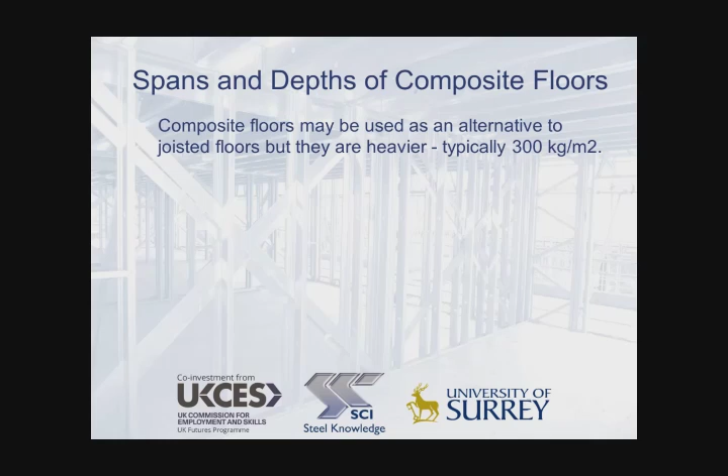Here's some information about the spans and depths of composite floors. They may be used as an alternative to joisted floors, but they're much heavier, typically around 300 kilograms per square meter. Slab depths range from 130 to 200 millimeters, depending on their span.

Steel decking may be in two types, either a reentrant or trapezoidal shape. The span to depth ratio of the slab should generally be less than 30 to control deflections, so it follows that a 5 meter span is achievable for a 170 millimeter deep slab.

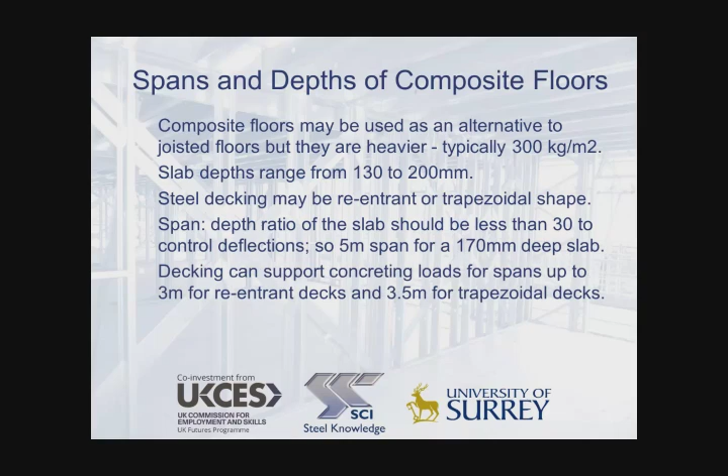The decking can support concreting loads for spans up to about 3 meters for reentrant decks and 3.5 meters for trapezoidal decks. And finally, props and spreader beams or timbers are required where unpropped spans are exceeded.

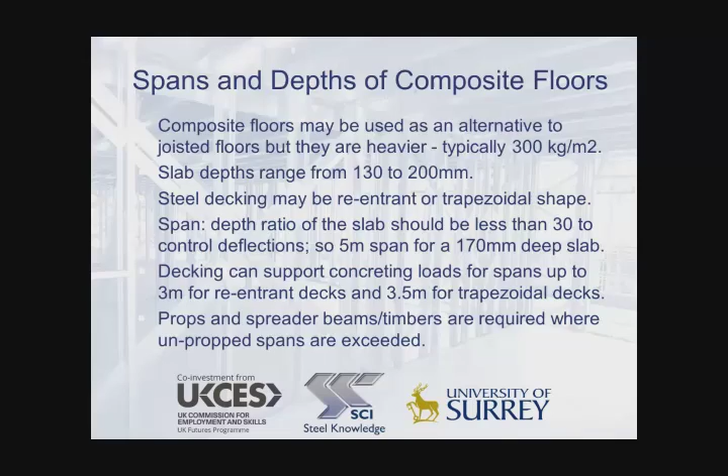Here we see three types of decking. In the top, the reentrant shape, generally round about 55 millimeters deep, with the center-to-center spacing of the ribs of 150 millimeters. Secondly, a trapezoidal profile with a slight reentrant stiffener to allow for attachment of service hangers, in this case with center-to-center of the ribs 300 millimeters apart. And finally, a trapezoidal profile of similar shape, in this case 80 millimeters deep.

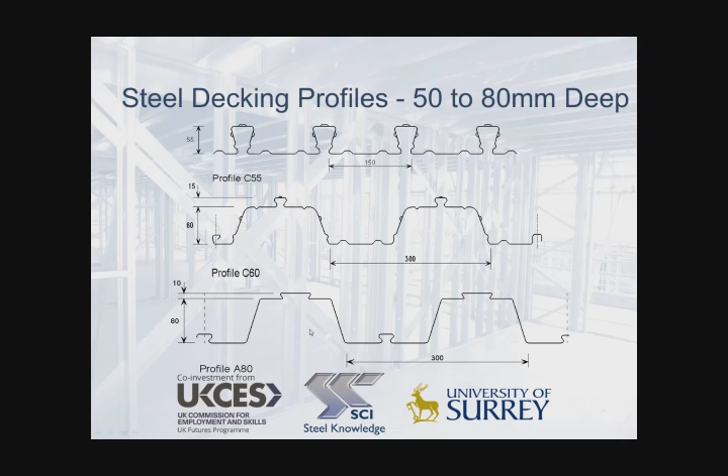Here we see an example of safe fixing of decking, in this case 80 millimeter deep decking. The operative is fixing the edge trim to the end of the span, and for this operation he is fixed by a safety harness to a lanyard.

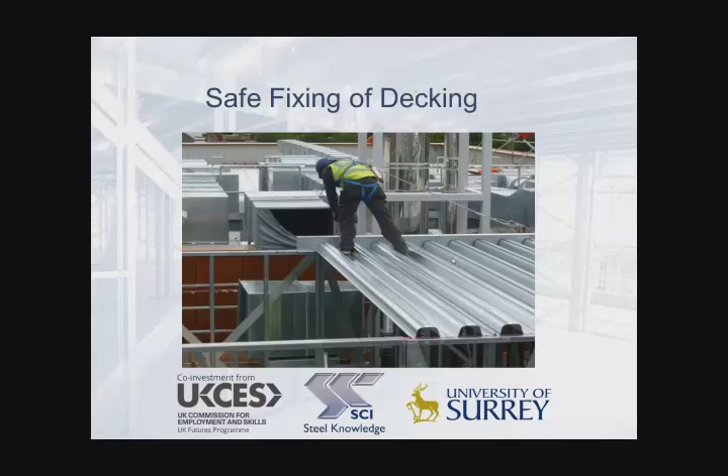It's also possible for steel decking to be delivered with crushed ends that can be placed on light steel walls, as shown below, and this means that it's possible to prevent loss of concrete from the ends of the decking.

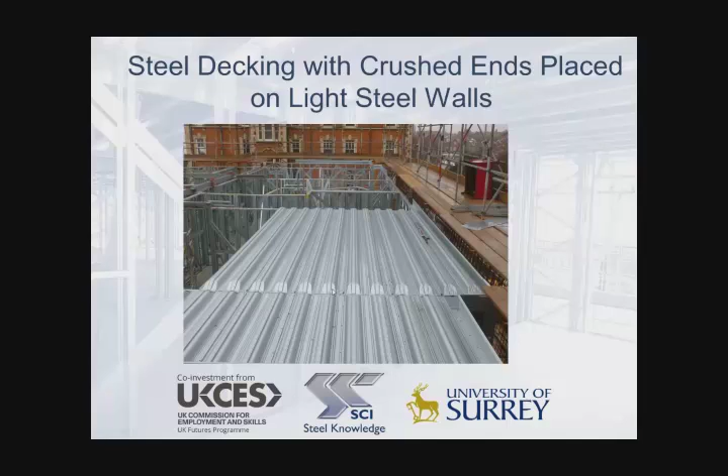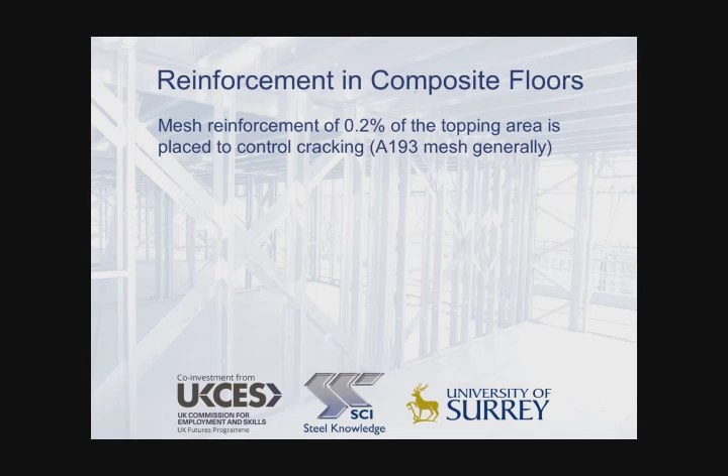Regarding reinforcement in composite floors, mesh reinforcement of 0.2% of the topping area is placed to control cracking, and this leads to a mesh area of around about 193 millimeters squared per meter length in both directions.

Mesh can provide continuity for fire resistance of up to 2 hours for spans of up to about 3.6 meters. For longer spans or for single span decking, it's necessary to use additional bars in the deck ribs, and these are typically 12 millimeters diameter.

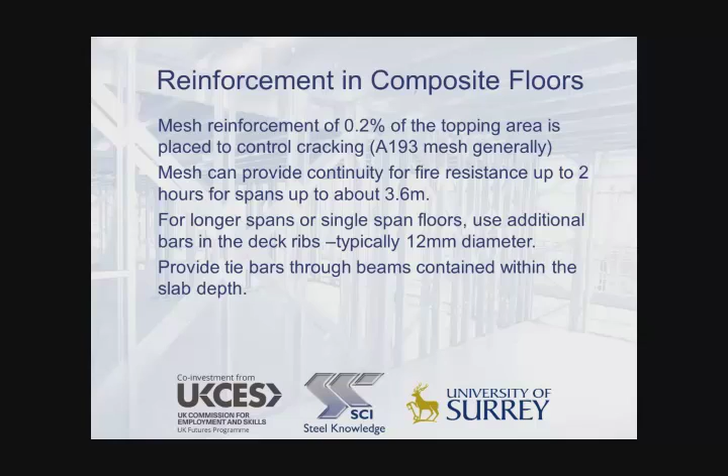It's also necessary to provide tie bars where beams cross the slab within the slab depth. And for vertical tying action between walls and the floor, it's often necessary to use threaded bars, typically 10 millimeters diameter, to provide continuity in the vertical direction.

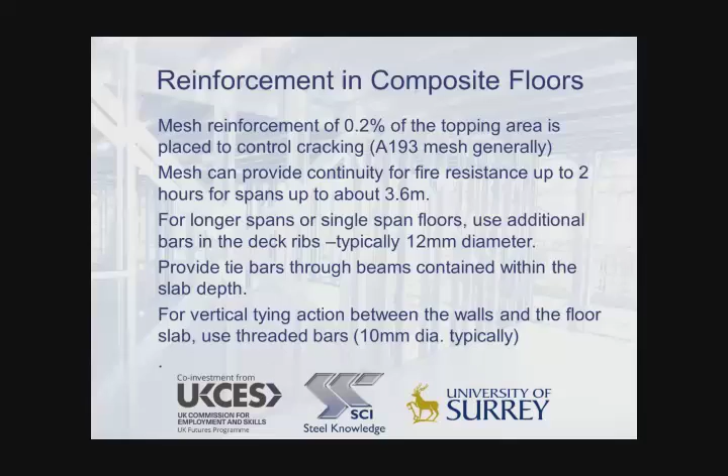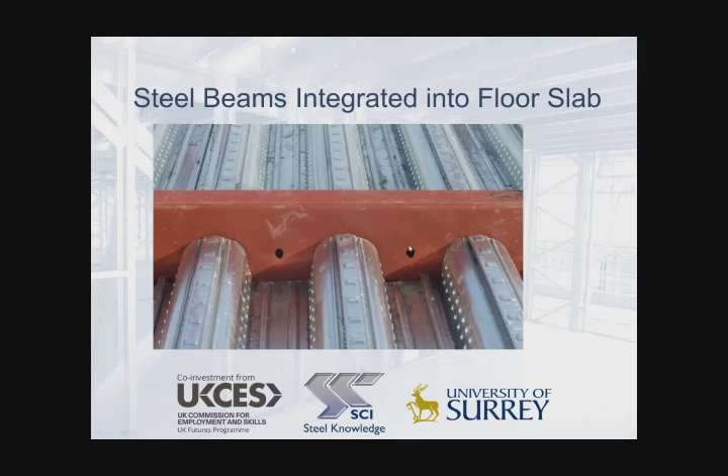Steel beams, such as rectangular hollow sections, may be integrated into the floor slab, as shown here. In this case, it's necessary to pass bars through the holes in the web of the RHS sections to provide for continuity.

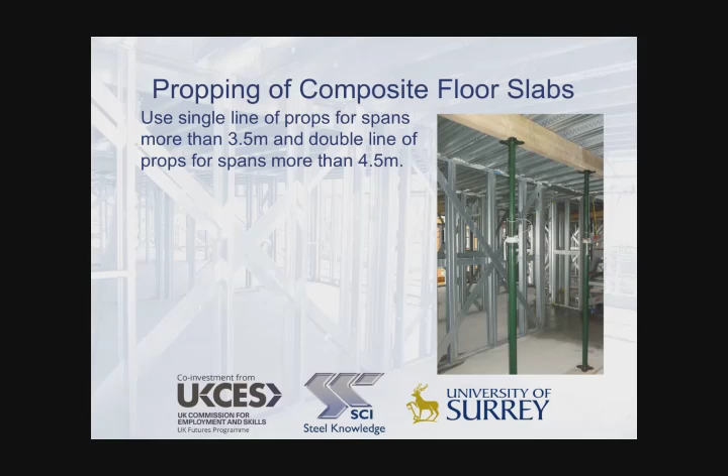Regarding propping of composite floor slabs, as shown on the right-hand side, it's generally required to use a single line of props for spans more than about 3.5 meters, and a double line of props for spans more than about 4.5 meters.

Props are generally placed at not more than 1 meter apart in the transverse direction. And timber spreaders should be used below the decking and shouldn't be less than 100 millimeters wide.

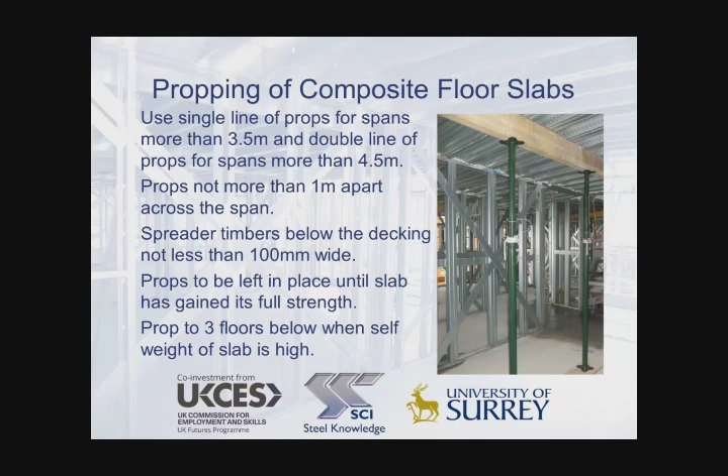Props should be left in place until the slab has gained its full strength. And often it's required to prop up to 3 floors below when the self-weight of the slab is quite high.

Concrete placed on steel decking is generally a pumpable mix. In some cases, self-compacting concrete may be used to minimize vibration and tamping. The specified cube strength or cylinder strength C25/30 is generally used.

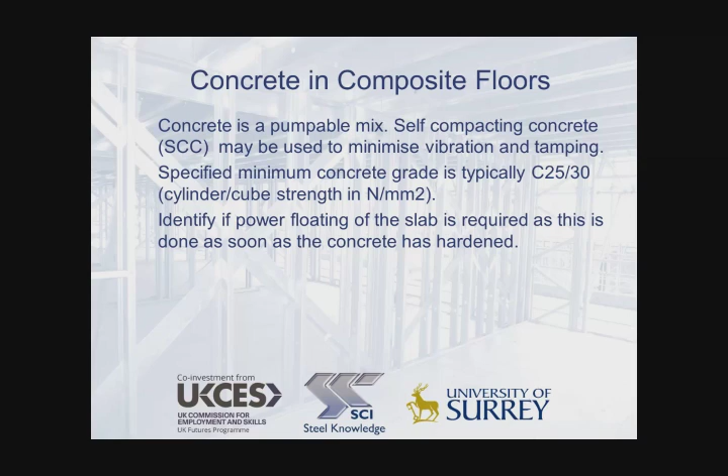It's necessary to identify if power floating of the slab is required, as this should be done as soon as the concrete is hardened. The gain of concrete strength is generally 70% after 7 days, which influences the ability to deprop the slab.

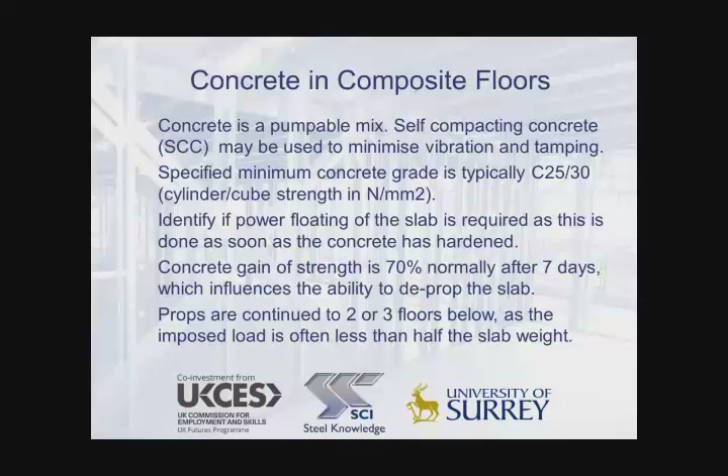Some other features of composite floors are as follows. Services can be placed below the floor and are suspended from the decking.

Pipes of up to 150 mm diameter may be drilled through the slab and detailed with suitable fire dampers as they pass through the slab. However, service risers and larger openings should be detailed into the decking layout before concreting.

A fire resistance of up to 2 hours can be provided by use of additional reinforcement, and this leads to the use of a single layer of plasterboard.

Finally, although the acoustic insulation is very good, control of impact sound may require the use of a resilient layer on top of the slab.

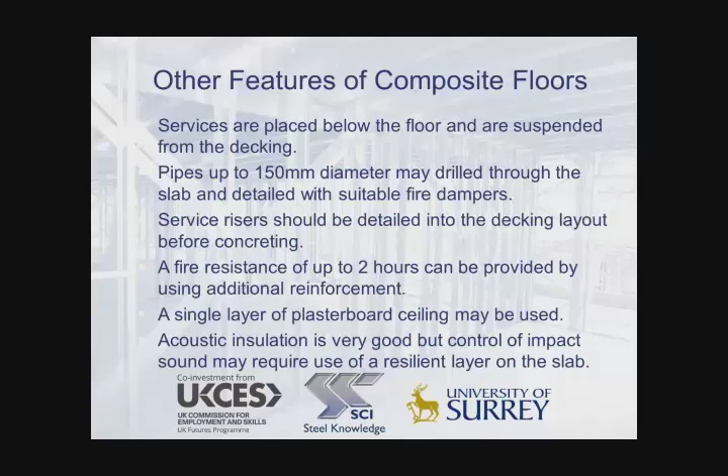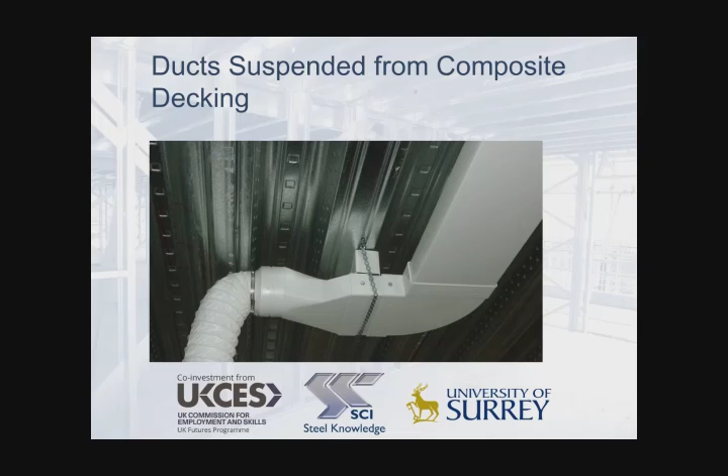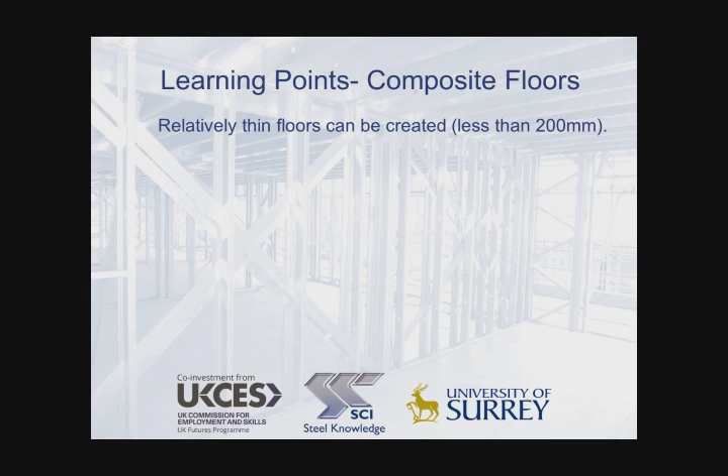So what have we learned about composite floors? They lead to relatively thin floors, up to less than about 200 mm, but the self-weight is 3 to 4 times that of a joisted floor, which therefore increases the loads on the walls.

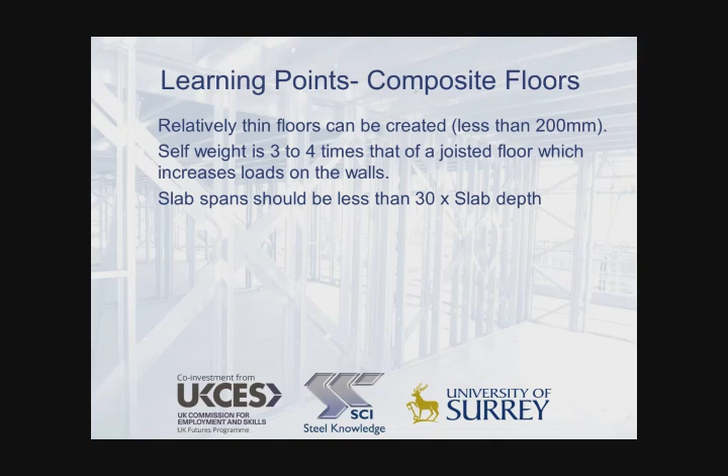Slab spans should be less than 30 times the slab depth to control deflections. The construction cycle is slower than that of a joisted floor because of the need for the concrete to gain strength and to remove props.

It has good fire resistance, which means that a single layer of plasterboard may be used below the floor, and services may be suspended below the slab. Holes have to be drilled or core cut for vertical services. And finally, impact sound insulation requires the use of a resilient floor covering.